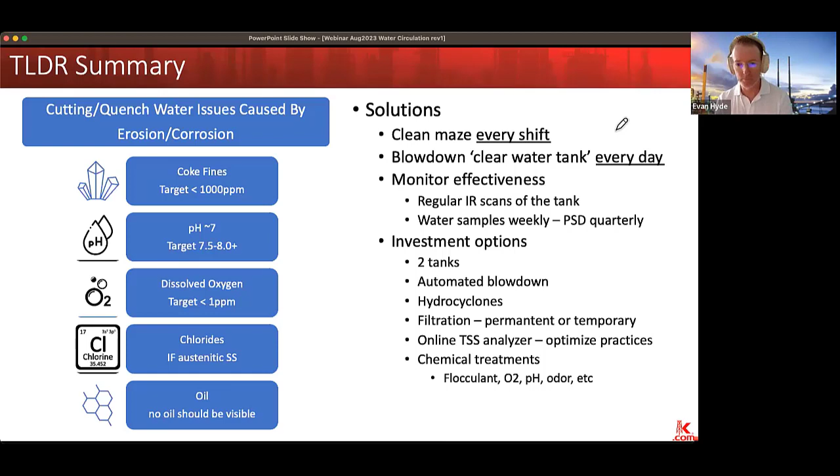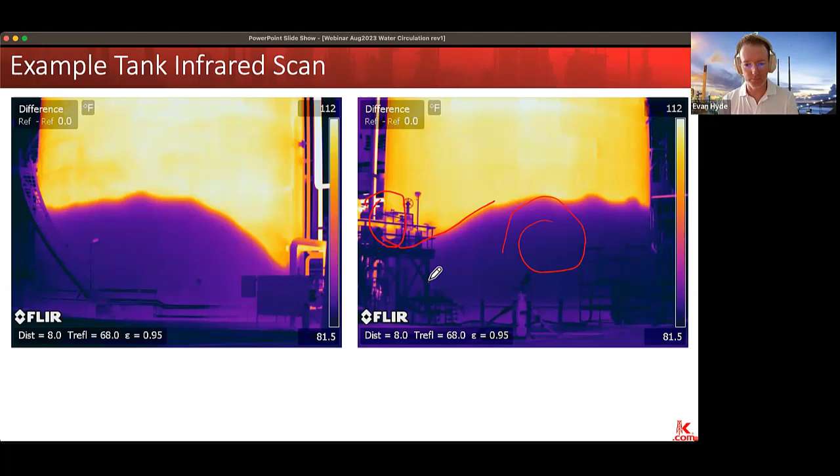Let's talk about this typical arrangement of a settling system. The most common one in the world is by far the maze, where we're trying to take an elongated flow path and shrink it into a smaller plot space by adding these overflow and lane arrangements. The water comes in, moves around, and then gets transferred by a pump over to the tank.

The typical effective length of all the lanes is on this order of magnitude. Again, there are bigger and shorter ones. The depth also varies substantially around the world, but more or less it's somewhere on the order of 10 to 20 feet, or about 5 meters or so.

There's typically a variety of overflow and underflow weirs, and the amount and position of the entry points we'll talk about later is highly variable. Generally, at the far end of this maze, there's either a long shafted pump or a submersible pump that lifts the fluid into the cutting water tank. One interesting caveat, since we're often focused on safety with coking.com, is that if you have a long shafted pump, there's a limit to how long those shafts can be.

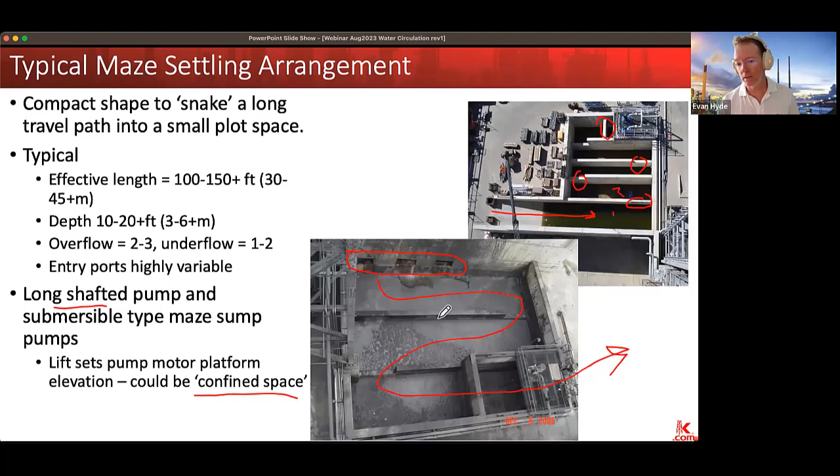So this would be lane number 1, lane number 2, 3, 4, and so on. These guys actually have 5 lanes, these guys only have 3. So there's a variety of configurations out there in the world.

So where does this damage typically manifest itself? Quite often we see a lot of erosion corrosion in the piping, true of both the high pressure and low pressure systems, not only for cutting but also in and around the quenching system. We also see challenges with the decoking valves, particularly immediately downstream of the decoking valve. We'll talk about that in a little bit.

If you have a lot of problems with your coke fines, it can manifest itself in terms of damage to the internals of the cutting tool. There's a nice picture of that right there; you see coke fines packed in there. Interestingly, one time I've actually seen it so bad it looked like toothpaste was coming out of the nozzles on the cutting equipment when we got a particularly bad slug of coke fines through the system. It's amazing how far things get.

I also chose this particular picture, the flow straightener from the inside of a cutting tool, which many of you would recognize. There are pieces of shot coke in there. It's debatable whether these pieces of shot coke arrived at the flow straightener because they were using the cutting tool as a jackhammer in the drum, or if they arrived via the water supply to the cutting tool directly.

Both are equally possible, but typically we don't expect pieces of shot coke that big could make it through the entire settling system, through the tank, etc. But coke is miraculously good at getting all over the place. We can have erosion of the cutting hoses, of the internal components of the rotary joints, etc. I chose this picture too; it's a photo of the drill stem showing outside pitting.

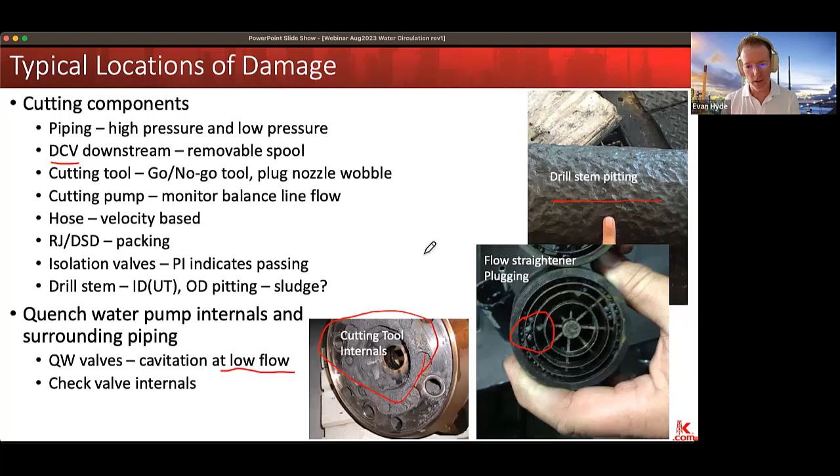and reliability. And this, as a result, is really stressing some of these quench water valves to be able to manage that very low flow and causing damage to the valves themselves and also the piping surrounding it. So keep in mind there and keep on the lookout via inspection. So what are we talking about here?

Really what we're trying to do is we're trying to take a solid, which is nominally more dense than water, but the density difference is not huge, right? So the typical formula that we discuss when we're referring to this is Stokes' law, which is taking a look at the density difference between the particle and the fluid. There's a viscosity term in there.

And this basically determines the velocity at which a particle will fall out of solution. And so we can measure and predict for a given size particle how fast it's going to fall in solution. However, as we already noted, those mazes are there to allow water to travel horizontally across them. And so you're going to have a velocity profile of the water traveling across the maze, as well as a concentration gradient of particles in the solution as well.

And that's further complicated by the fact that as you get closer to the bottom, so this is going to be the sort of the bottom of the settling zone, as the water is traversing across it, you're going to get traction and movement of that material.

And as this layer builds up, so as the amount of fines in the settling system increases, obviously the velocity profile changes and the amount of material dragging across there, because you're still basically moving the same amount of drain water, the same amount of cut water across there. And as a result, you get increased velocity and increased traction across there.

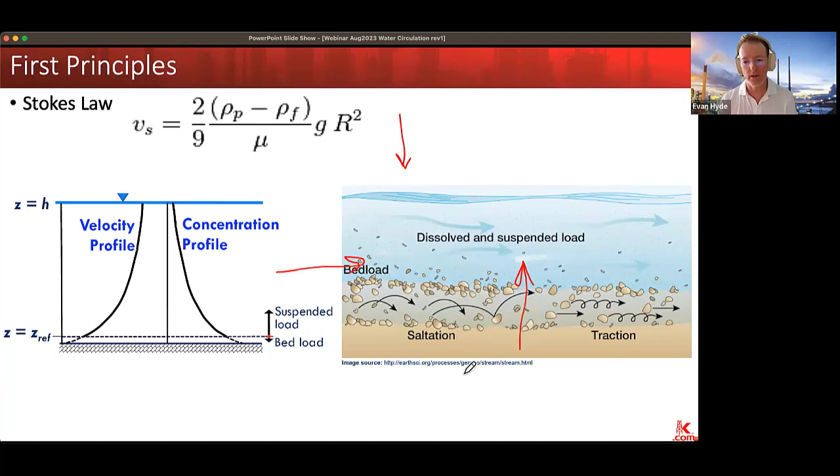So there's some really interesting science out there that you can use to determine the rate of falling out of this. But a lot of it comes from beach erosion and sand research. But if we take some of that math and we give ourselves a sort of hypothetical fines maze system, and all these units here are in meters.

It's 3 lanes. Each of them is more or less the same length. The third one's a little shorter because of the sump. Depth is about 4 meters. So you see that, and you end up with a curve, sort of an exponential curve, which is settling velocity as a function of particle size.

And for a given drain rate, so this is pretty healthy drain, almost 3,000 gallons a minute. Some of the bigger drums in the world with very large drain lines, they can actually exceed 4,000 gallons a minute drain velocities. Some smaller cokers with small drain lines, much, much lower.

So all these numbers get factored into this set of equations, and you end up with sort of looking at, as the fines build up in the lane, it's going to take up a certain percentage of that depth, right? So we start with 4 meters, and at 4 meters deep, with all these assumptions, you can expect that everything bigger than 143 microns is going to fall out in that maze.

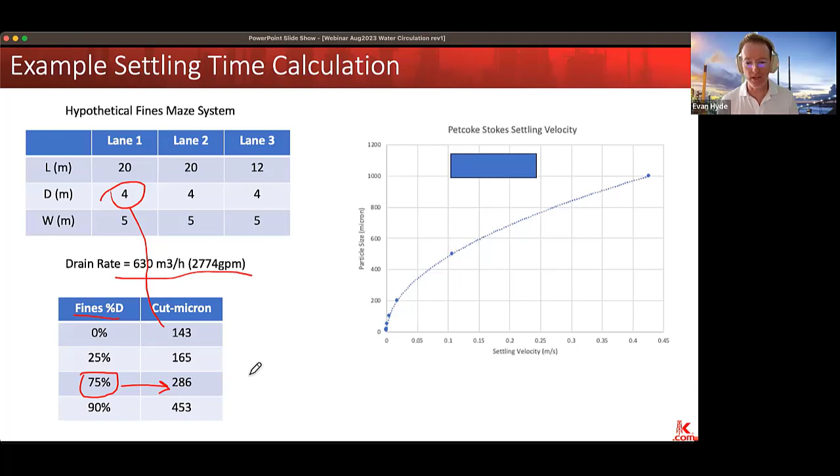Now, as the lanes fill up, let's say to 75% full, that cut point is going to increase to 286 microns. So these are the size of particles that we would expect to end up in the cutting water tank. So obviously it behooves you, as I said at the top, to continue to clean that maze very, very regularly, because it has a direct relationship to how much material ends up in your cutting water tank.

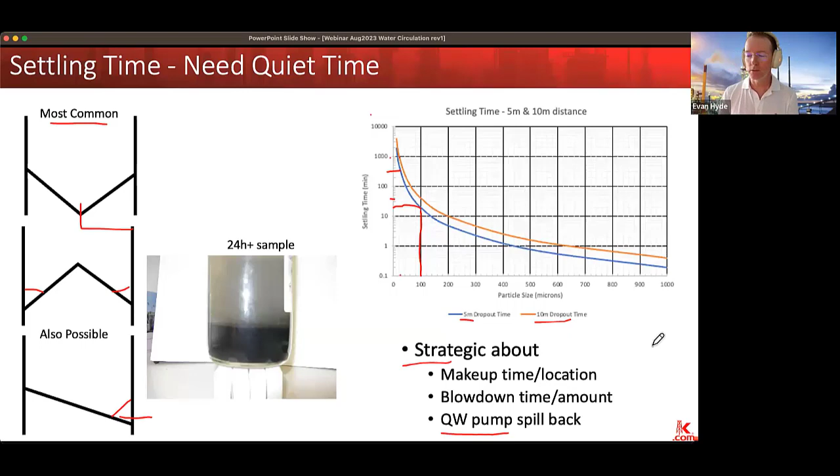So here's some particle size distribution analysis that was done for some water samples from a coker that we worked with. So I thought it would be interesting to say, okay, well, let's say I have a tank that is relatively tall and I want that particle to fall 10 meters, and I need to find quiet time because I want to get below 60 microns of particle sizes, right?

So the coke cutting folks from Ruhrpumpen, Flowserve, whoever, they will say that most of the fines that cause problems are bigger than 100 microns because they have momentum, they have the ability to do the erosion. However, there is some interesting data from some of our client sites that shows that very bad erosion can actually happen from 20 or 30 micron particles. So it's not just the big particles that cause trouble. It's as much an absolute concentration effect as it is a particle size effect.

But let's say you wanted to get below 60 microns, you might say, well, I need 100 minutes of settling time. So I need to find a time when my tank can more or less be stagnant for 100 minutes to allow those particles to drop out, and then we will drain the tank and potentially get to a relatively clear water situation. But you'll notice that this is from actual quench water sampling.

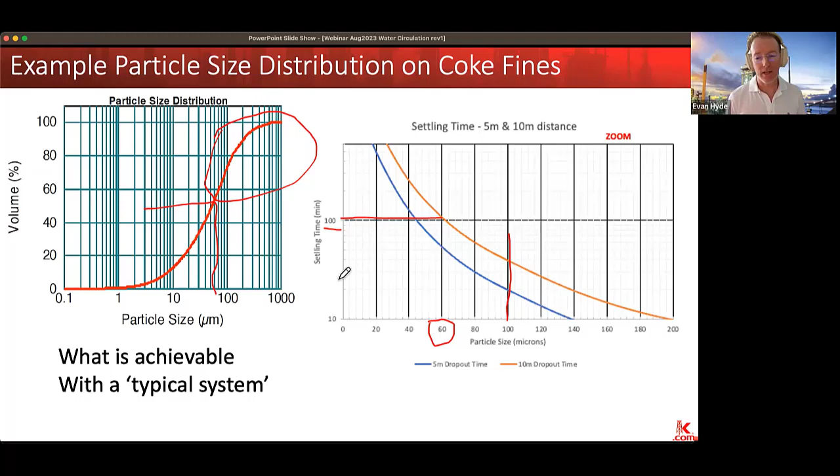Let's see if we can find 60 here. 10, 20, 30, 40, 50. I think it's more or less here. Up we go. That cut is about 50%. So clearly they're having trouble because they're not settling 50% of the material that could otherwise have potentially dropped out of solution in a reasonable time, which is 100 minutes. 100 minutes is totally doable for 2 drum cokers. For 4 and 6 drum cokers, finding 100 minutes of quiet time in the tank is very difficult in many situations.

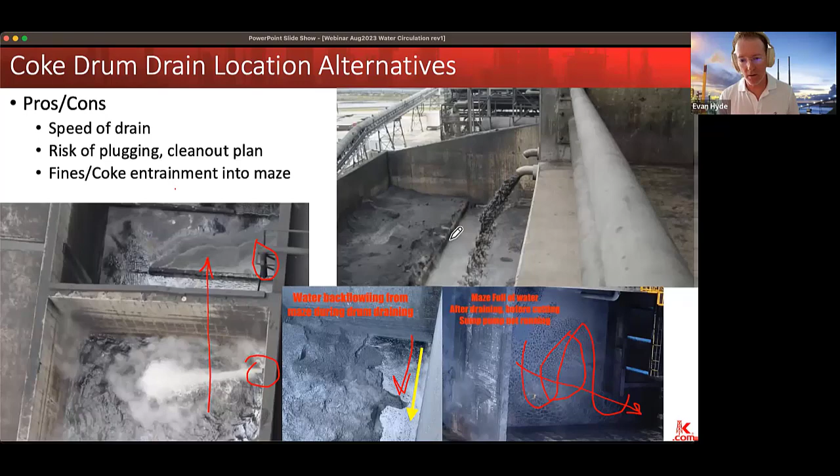So managing the level and making sure the pumps are adequately designed, adequately sized to manage your drain rate is also important, because if you overflow this thing, it's not going to do anybody any good. So all of these things factor into how effective the maze will be. There's also a filtration effect from the coke bed itself, and this can be a good or a bad thing, depending on how many openings you have in your wall.

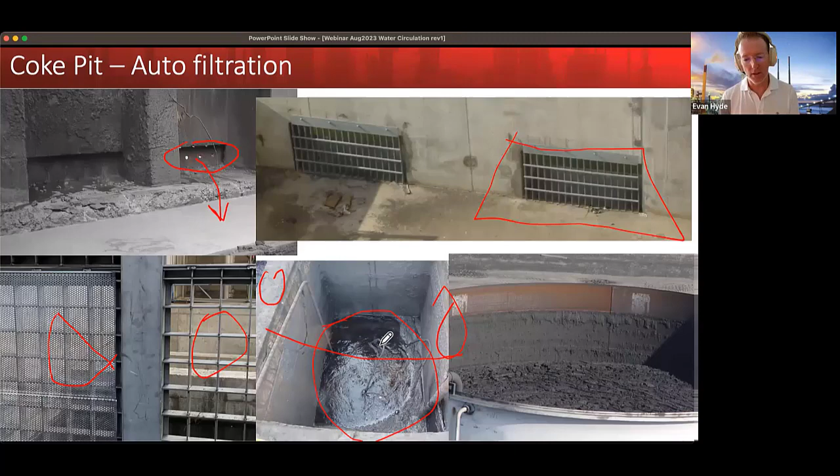for the maze. And periodically, they actually lift this up, wash it out, get the small particles out, but put the big coke back. So it's sort of like a relatively inexpensive filter. But stuff still does get by, and you see floaters on the top of the cutting water tank.

I do understand and feel compassion for the crane operators, because I know that cleaning the maze is often one of the most difficult things to do as a crane operator. So it's especially important to be done, but I know it takes time and is tricky. And if you're already time constrained because of unit capacity expansions, whatever, this can be a challenge.

Now, it's also a challenge in sites that do double handling, which it turns out in crane sites is most of them. So there are some things you can consider, upgrading the crane or upgrading some sort of operator efficiency.

There's some decent benchmarking out there with regard to how quickly a well-trained crane operator can move coke, and you can compare yourself against that if you're really up against a time constraint.

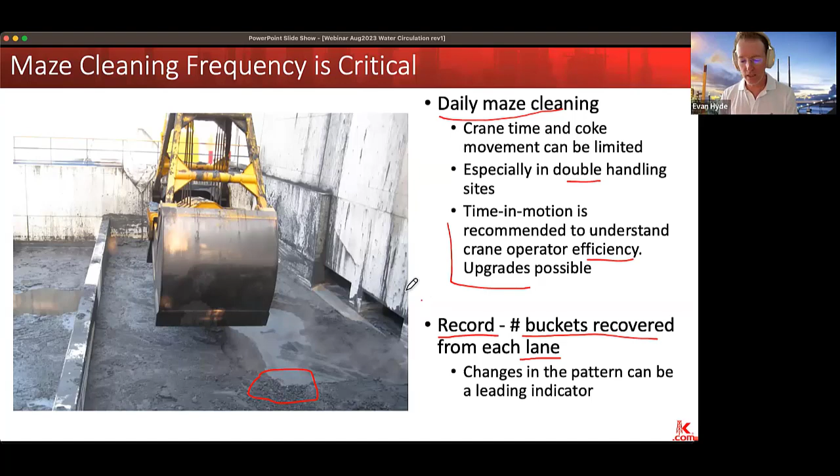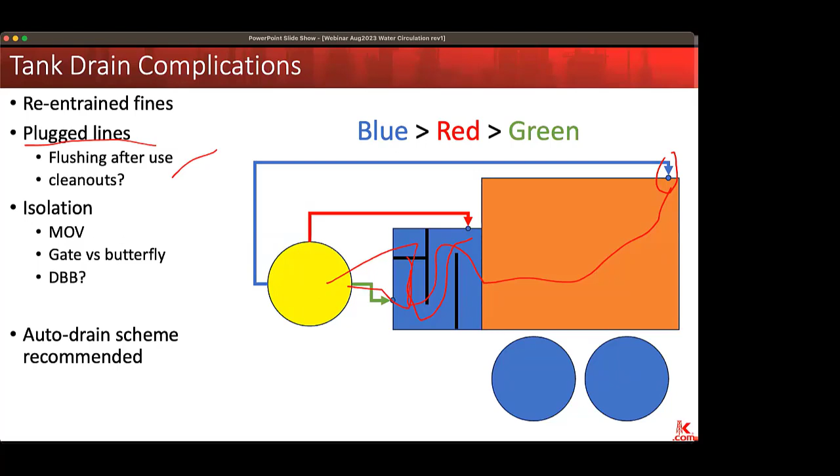Lastly, there's a variety of ways to isolate these tanks. The most common design I've seen is some sort of gate or butterfly valve, usually a double block at the drain.

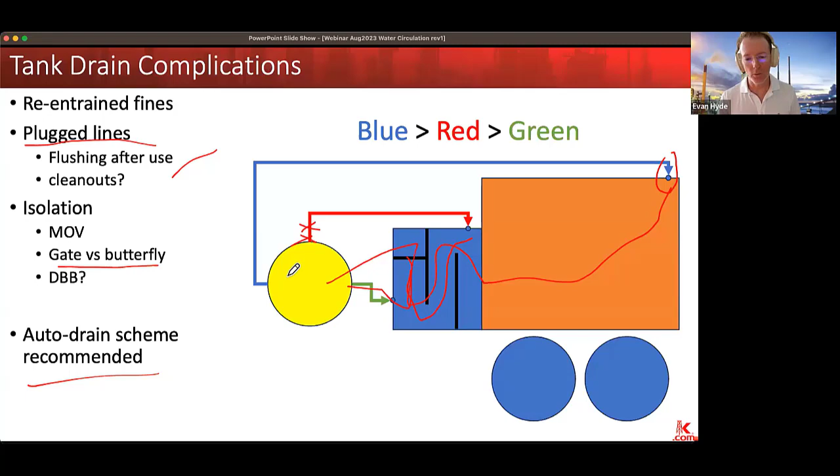Realistically, and I'll talk about this later, there's some pretty good evidence that if you automate this system—which relatively few people have done, but I think it comes as a relatively inexpensive solution to manage this on a routine basis—by adding an MOV and some sort of logic for when you do this, you can actually achieve a relatively good drainage scheme.

So let's talk about samples a little bit. I think I see some questions coming in, not a ton, but definitely some, so I want to make sure I leave time for questions. We're going to keep charging here.

As it pertains to the cutting water, we recommend ideally daily sampling, but I'm a realist. I would like to see daily, but let's just go with weekly as a compromise with our friends in the lab.

The sample system doesn't need to be overcomplex. This is more or less water—if you have other things in there that are potentially questionable, that's a different story. But if it's just water, you don't need some elaborate sampling system. You just need a safe disposition for it, making sure you allow it to run and become a good, clean sample—that's probably the simplest solution.

Some sites have flowing loops, which is great, but in some cases they have very long runs of tubing, and that complicates it because you actually have to let the sample run for a surprising amount of time before you can get a representative sample of what's in the pipe. So there are pros and cons of both, but making sure you get a representative sample is important.

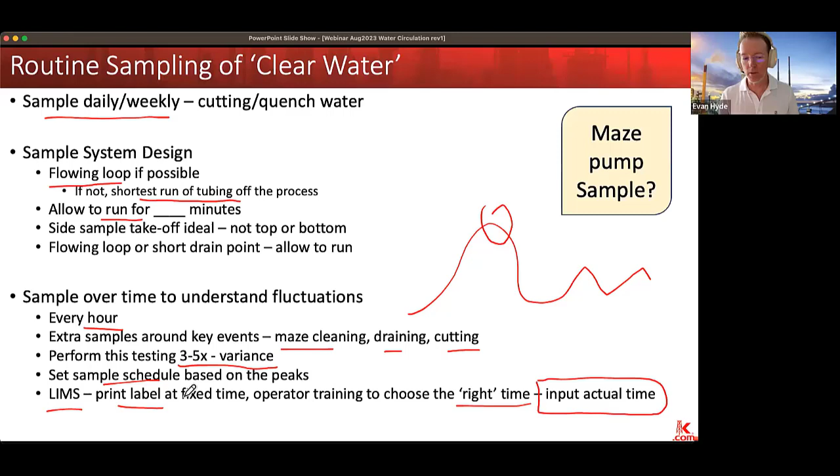The label is going to be printed, but in reality, that may not necessarily be the right time to do that sample. Maybe it's 11 a.m. that day, maybe 5 p.m., I don't know, whatever the cycle dictates. So it's fine to print the label, but it's really important that the operator actually take the sample at the right time, record the time on the tag, and that needs to be input back into the LIMS system so that later on we can understand when this sample was actually taken.

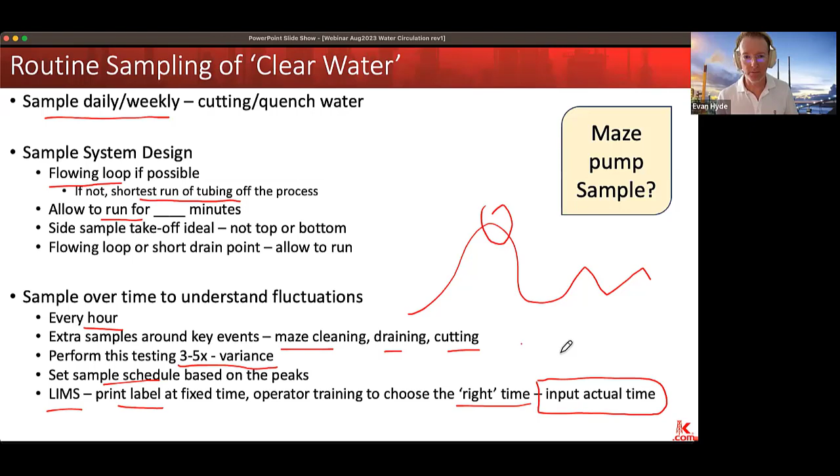This is true for a lot of coker samples because of the batch process. You don't want to take a light coker gas oil sample in the middle of a backwarm - it's not going to be pretty. So something to be considered.

So this slide is basically here for reference. There's a number of standard tests that we would recommend.

Obviously, total suspended solids - we like it to be less than 1,000, as I said on top. Best practice is realistically less than 500. Some people even do less than 200, if you can believe it. But I know some sites struggling with 2, 3, 4, 5,000 ppm in their cutting water, and they have reliability problems with the cutting system that come with poor water quality.

Again, particle size distribution - we're looking for less than 100 micron ideally. We're going to talk about corrosion in a second, but pH and dissolved oxygen are critical variables to that mechanism.

Now, there are a number of sites in the world that do other things in terms of making up their water. Some people do boiler feed water, some do fire water which has questionable quality, some do stripped sour water which could potentially have phenols in it. And in some relatively rare cases, people actually make up water with sour water, typically from the blowdown. This has the result of complicating what you need to analyze for your particular facility.

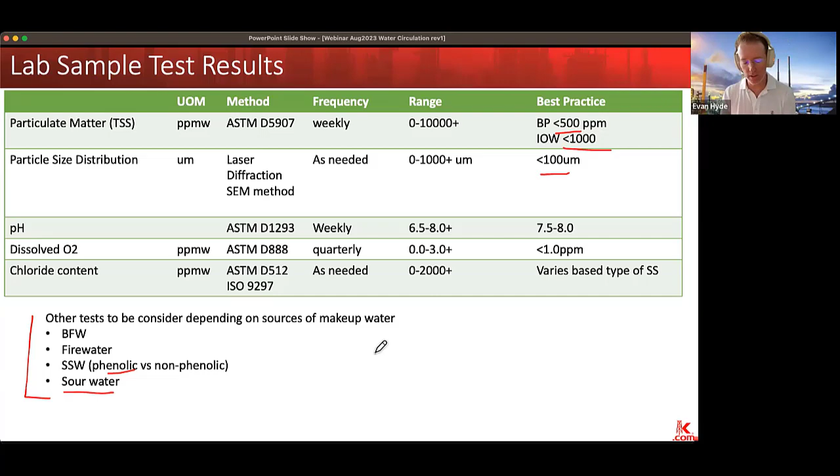So there was a nice case study done by our friends in India back in 2008, published in Hydrocarbon Processing - you can look it up if you like. Long story short, they were struggling with a high corrosion rate in their cutting and quench water. They installed some corrosion coupons and were seeing 50 plus mils per year corrosion, and they did a number of things to manage that.

After managing it, they were able to get it down to 10 mils per year. You can see all the details in their study, but in principle, they put an oxygen scavenger in there because dissolved oxygen contributes to this erosion corrosion phenomenon, and they were able to get the O2 down significantly lower. They made some material improvements, and as I alluded to earlier, they automated their drain scheme so that they are continuously and repeatedly blowing down the tank. They also added another corrosion inhibitor to get this in check.

So, a good case study out there - I'd encourage you to look at it if you're curious about this topic.

So let's talk about pH. A lot of the chemistry that damages our components is a result of acid attack. So if you can do something to improve the pH to about 8 or so, you have a chance to passivate some of those internal surfaces and manage it from an acid attack situation. This can be done with chemicals, or your makeup choice of water could potentially impact your pH in that system.

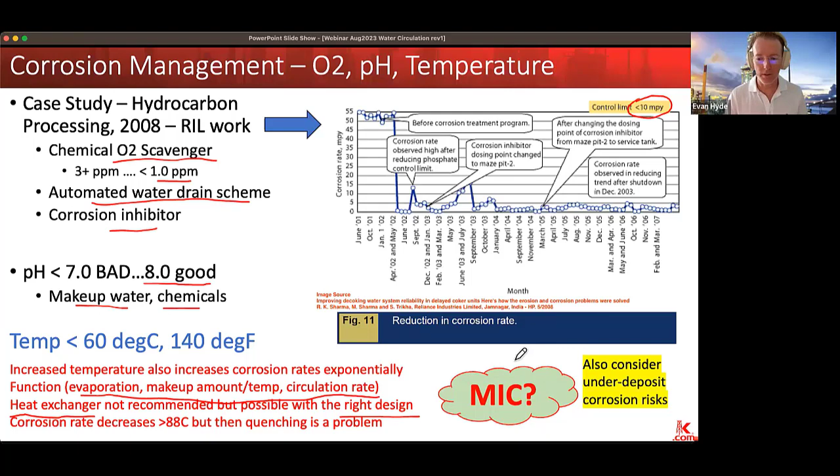It might be a manageable situation, but generally heat exchangers to cool this system down are not recommended. Now, in the literature, there's some discussion about microbial-induced corrosion, MIC. I've never personally encountered it, though I've heard rumors of it being a problem in this circuit. And then under-deposit corrosion also is something you'll read about in the NACE literature for this circuit as well.

So let's think about where this erosion corrosion typically bites us. Oftentimes I see it in particular in and around the decoking valve bypass. So what you're looking at is a photo from a Flowserve sort of Pacific style decoking valve. This is the high pressure discharge this way, and then this is the bypass going back to the tank.

You'll notice there's some swedges here, and it goes from 4 inches up to I think 6 inches, very short distance. Each one of those swedges is an opportunity for eddies and turbulence, and you get pretty nasty corrosion in this particular area, and then also at the elbows.

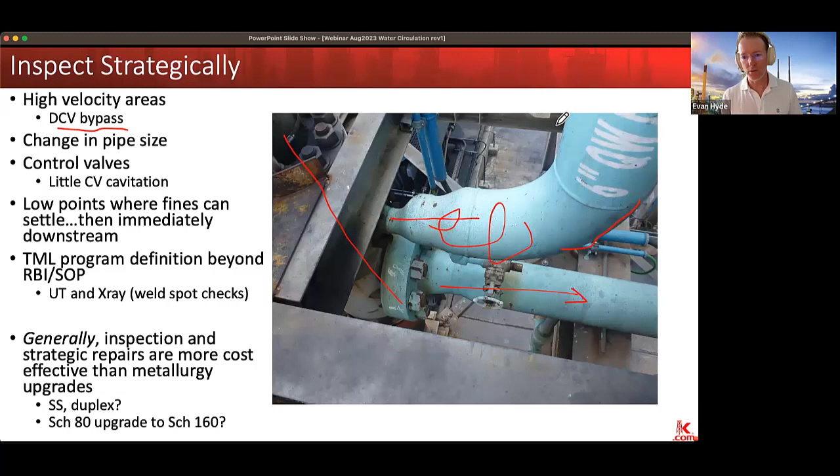So some other designers actually specify a longer straight run here. One of the things I like to see is potentially a removable spool. People will cut flanges into this system and make it so that this little piece is prefabricated. You manage it with inspection, and if it gets a little bit thin, you just take it out and throw it away, and put your new one in when the system's not running. It's an easy maintenance job, and that solves this particular problem.

Now, so this can be true of this exact location for the decoking valve, but it's also true of other components. Generally speaking, it's been my experience that inspection and strategic repairs during downtime is more cost effective than upgrading the metallurgy. Now, I know sites that have gone to stainless or have gone to thicker material to manage this problem, but by and large, unless you have some exorbitantly bad coke fines problem, generally you can manage this with inspection. So some other sites, some other things on this slide basically show where some of the places are that can bite you.

One of the other things I just mentioned is that in a given piece of pipe, it's quite often that we get accelerated corrosion on the bottom, 6 o'clock position, because when this system's not in use, the coke fines settle to the bottom. And then when you start it back up again, you get this inrush of velocity, which sort of cuts the bottom of the pipe.

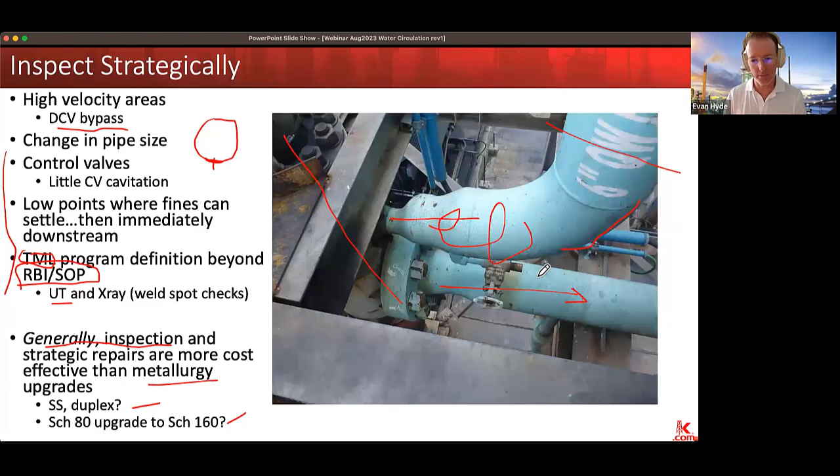After some growing pains and learning how to optimize the sequencer that controls this whole scheme, they've actually been able to dramatically improve the settling performance of this system to the point that some of their water quality coming off these tanks is some of the best in the world now. It wasn't on day one, but it is after much hard work and learnings from the folks at that site.

So multi-stage water settling, I think, is a great option if you have the real estate. A lot of sites don't necessarily have that real estate, but putting a second cutting water tank in, in terms of all the other solutions we're going to talk about in a minute, is often one of the cheapest and easiest solutions to really get your coke fines in check.

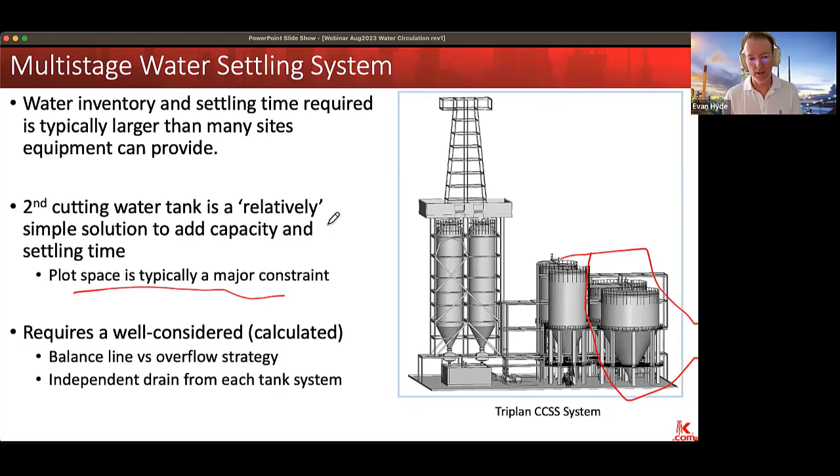There are folks that use chemical flocculants, and the chemistry is out there. There's some examples from our friends at NALCO and ChampionX - these are the products they would use in this service. You have to do a detailed benefit-to-cost analysis because the products are relatively expensive. I think we're talking on the order of $1 million per year.

So it just depends. But then also, you have to have a fairly complex, again, multi-stage settling system to where you can inject the chemical in some sort of smaller vessel, allow that material to go to a secondary settling vessel, and then potentially to a third one, which is the clarifier where the solids ultimately settle out. And if you have that scheme - there are some sites in the world that have like 5 and 6 tanks to do this - the water quality comes out great.

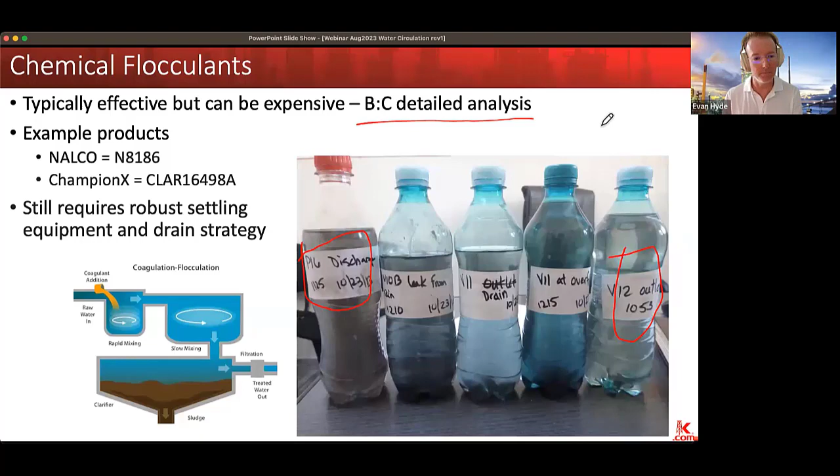And that seems like a great idea. However, I'll come back to this in a minute. One of the biggest challenges with hydrocyclones is the water comes in and it spins around, and the clean water goes out the top and the dirty water goes out the bottom. So for the cyclone to function, there's this little nut in the bottom, and the opening of that aperture controls the cut point of that given cyclone.

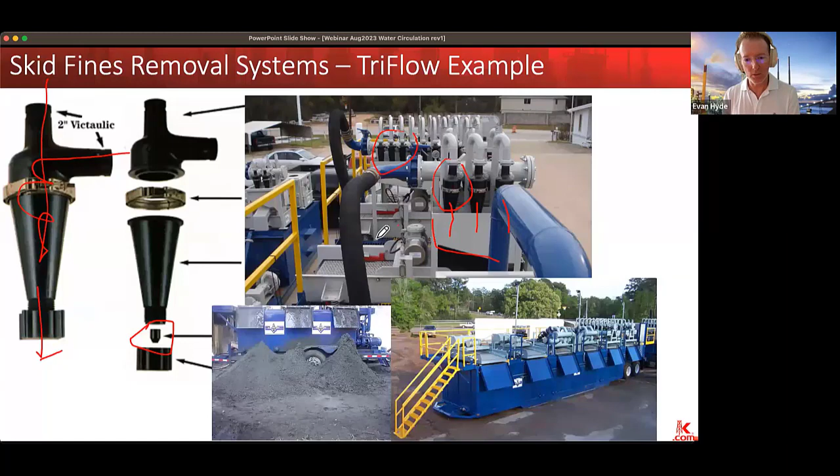And it's pretty simple - there's a little isolation valve on there, and you take this apart and clean that little cyclone. It takes 5 minutes and it's back in business, but you have to be able to physically see that cyclone to make sure it's performing its job perfectly. So hydrocyclones have generally gotten a bad rap, in my opinion, because they don't get the care and attention they need, which is constant cleaning basically. Or if you have a totally enclosed system, you don't really know if the cyclones are functioning properly - you have to do a maintenance job to get in there to see if it's functioning properly. So generally they work pretty well.

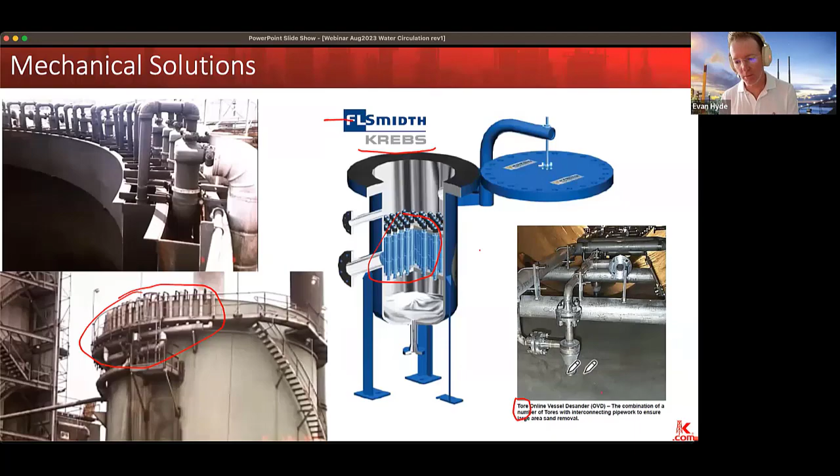But if you do get yourself into a problem where fines are everywhere, you need to get them out. So the simplest solution is to lower the level in the tank, get up there with a fire monitor, and blast the fire water around. If it's not horrible, you can often slurry that material up and get it out of the tank drain, and that works pretty good.

There are some other companies that sell or market a kidney loop system, which takes a slipstream of that water, moves it around, cleans it up, and puts it back in the tank. I reached out to Debusk in advance of this presentation to get some details - they're relatively new to the market. I didn't hear back from them, but I know they're out there pushing this service. Our friends who make our heavy coker gas oil filters also have a water filtering solution you might want to check into.

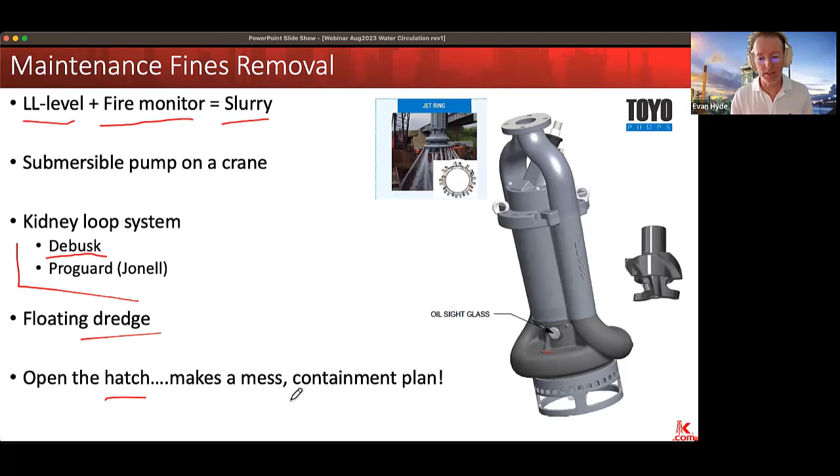And then there's dredging options for the maze. And then last but not least, of course, you could just open the hatch and allow the coke fines out. During turnaround, this is often the way it's done. It makes a hell of a mess, so just make sure you have a really good containment plan.